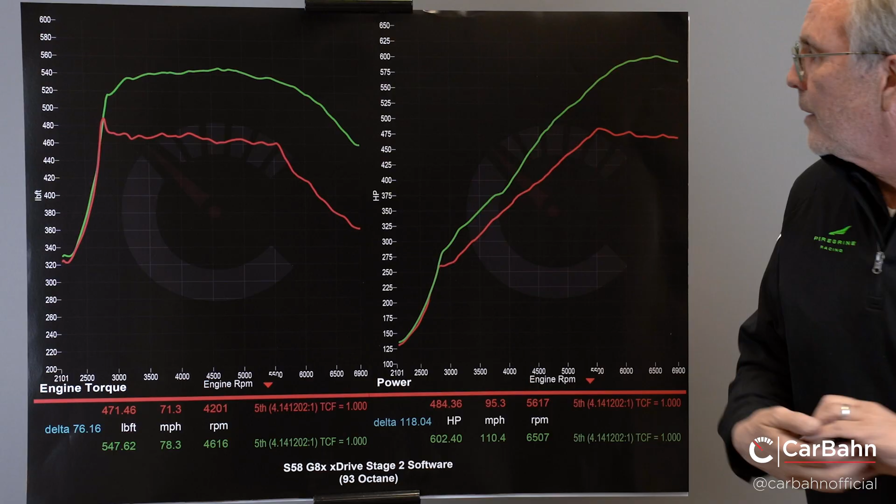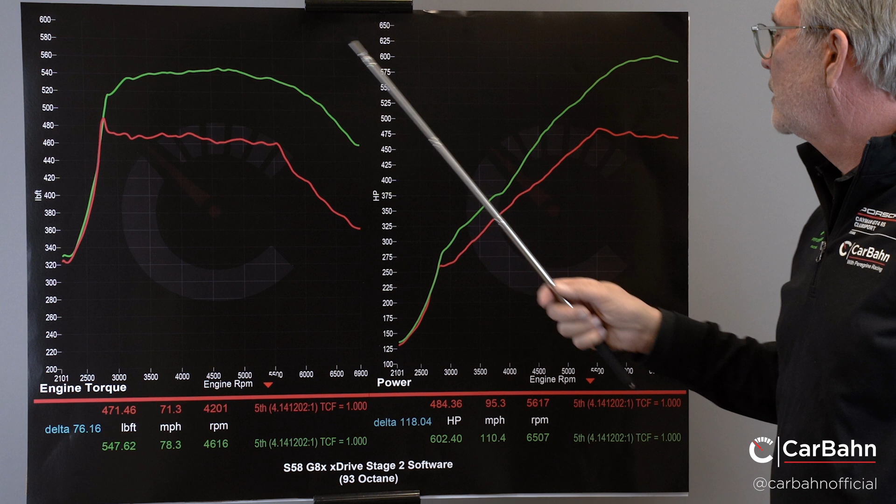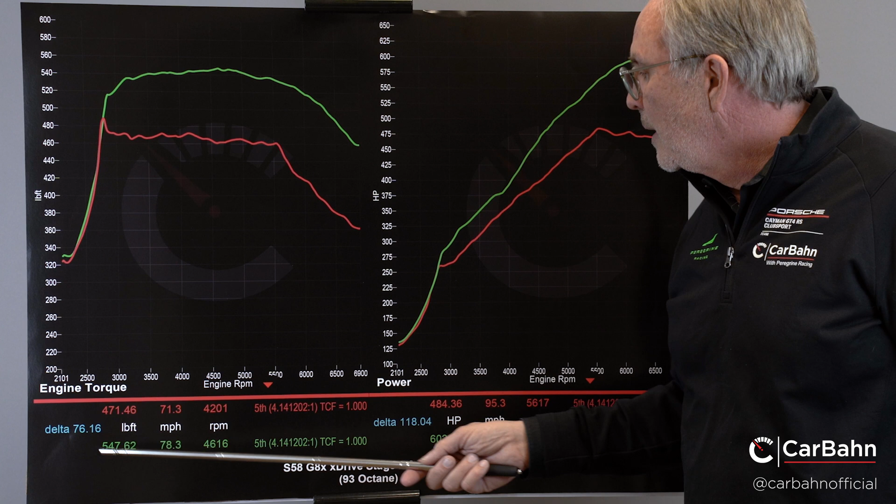This is the dyno graph for our Stage 2 software with heat exchanger on 93 octane fuel. This is OEM torque, CarBahn torque, OEM horsepower, CarBahn horsepower. As you can see, it goes from 471 on the stock torque to 547 on the CarBahn torque, a gain of 76 pound-feet. On the horsepower side, we have 484 stock and 602 on the CarBahn horsepower, a gain of 118. If we translate this to flywheel horsepower and torque, the stock flywheel horsepower is 591 from BMW and 734 from CarBahn. Stock torque is 575 and the CarBahn torque is 668.

Now we can also add 100 octane fuel or a meth kit to this, and this will increase it even more. We don't need to increase the boost when we put the meth kit on. It'll gain a significant amount of power without having to increase the boost, which still keeps the engine safe. So let's put that graph up there and we'll show you that next.

I want to talk a little bit more about why the CarBahn heat exchanger is worth the investment. As I mentioned before, it's very light and very thermally efficient. Unfortunately, this racing style Formula 1 heat exchanger core material is very expensive, which makes the heat exchanger more costly, but it's well worth the money because of its efficiency and lightweight.

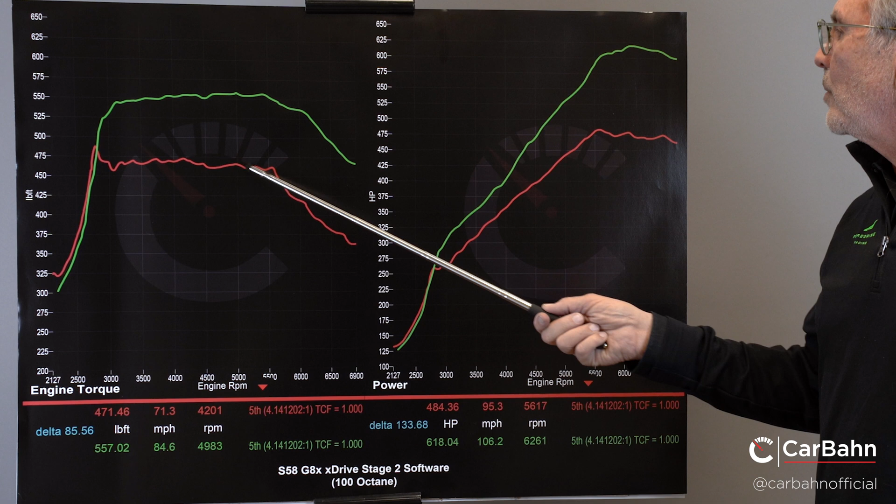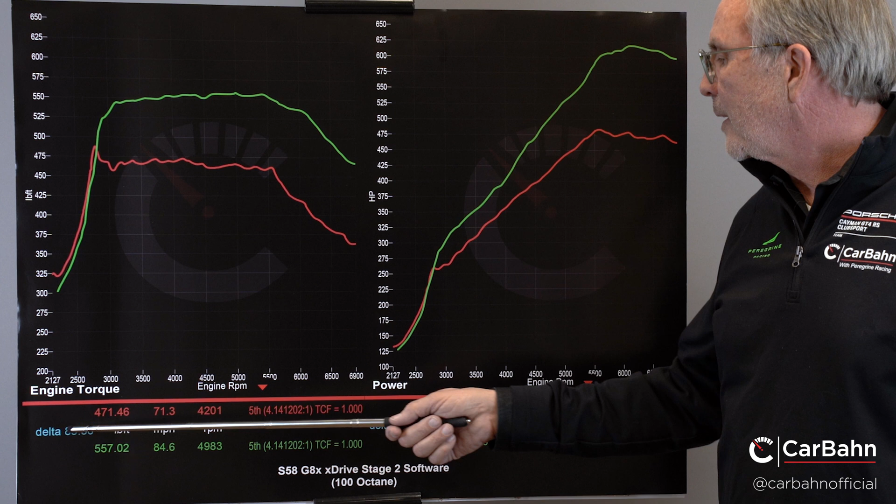Now let's talk about how much power we can get out if we put 100 octane fuel in the car. This is OEM torque, CarBahn torque, OEM horsepower, CarBahn horsepower. As you can see at the rear wheel, we're going from 471 to 557, a gain of almost 86 pound-feet of torque. On the horsepower side, we're going from 484 to 618, a gain of 134 horsepower at the rear wheels. At the flywheel, the stock horsepower is 591, and the new horsepower is 754.

That's a gain of 163 horsepower with software and a heat exchanger. Pretty phenomenal. The torque goes from 575 to 679, a gain of 104. We're producing over 750 horsepower, and because we're doing it in a safe way, we can offer you a factory matching warranty for 4 years and 50,000 miles, plus an extended warranty up to 100,000 miles, while still producing 750 horsepower. Quite a value.